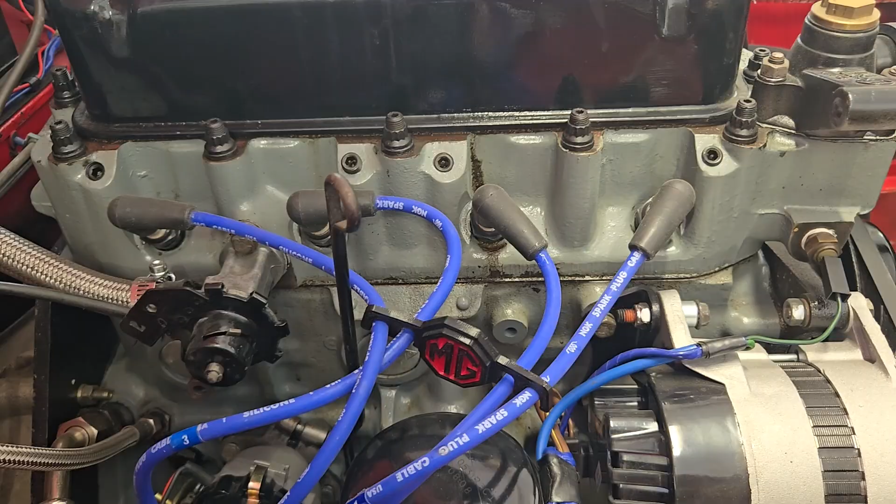All right, so this is the spark plug wire loom that I have been printing for folks. Again, emphasizing not selling, but printing and being reimbursed for shipping fees. The only other thing that I would charge anyone for is to paint it the specific color.

But this design was off of Thingiverse, and it specifically said not to make any money off of it. So there you go.

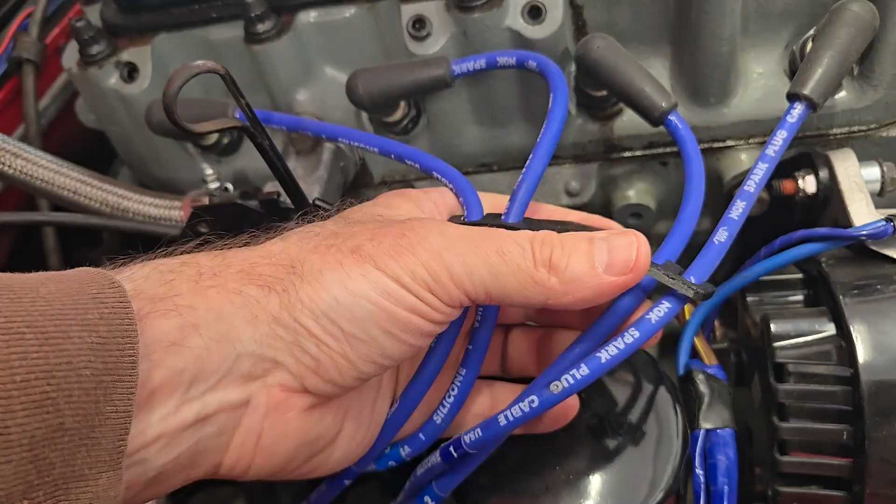There's a problem with this design though. It's two-dimensional, and it's in 3D space. Also, it is an interference fit, which means that the wires need to fit into these little slots, and there's a little nub on them that keeps them from coming out, but it doesn't really work that well. After a while, they vibrate, and you might lose the wiring loom altogether.

The biggest problem that I have with this, aside from copyright, is you can't see it. Because it's two-dimensional in 3D space, the logo should be facing up, but it's facing perpendicular to where you would view it. So I am taking it upon myself to make my own design.

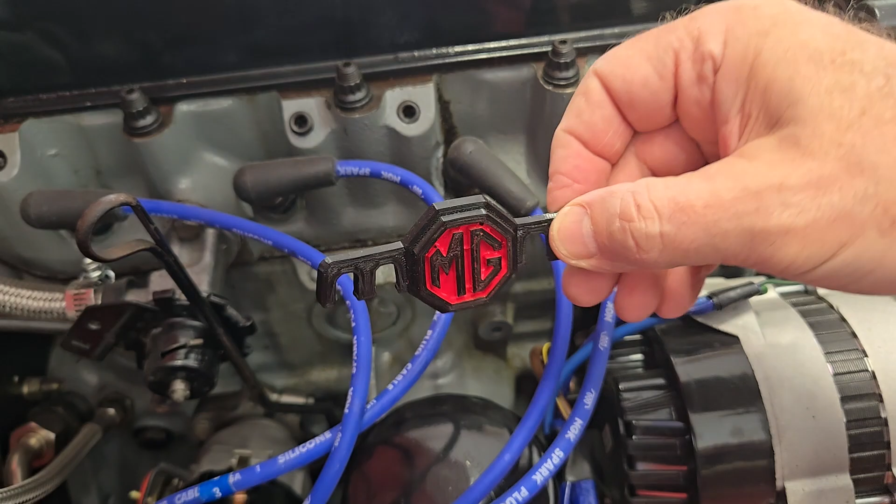Far be it for me to complain and not have a solution. So that's what I'm working on today. We're going to make a new wiring loom, and I'm going to sell it on eBay, and it will be my design, and it will be in 3D space so you can see the logo, and I'll make them available in whatever color that you want in the background here. So there you go, let's go ahead and get started.

I'll show you the design in my 3D CAD software.

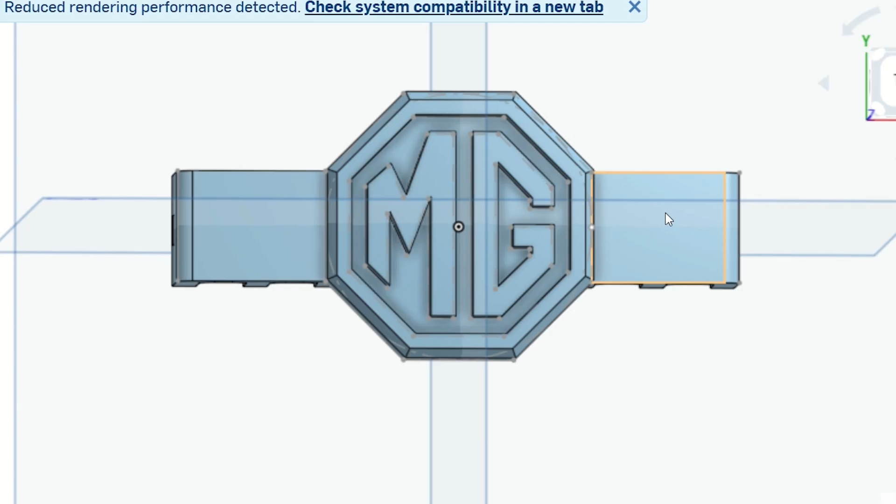All right, so this is my new design. It looks a little bit different, and that's because it has to be a little bit beefier. It's still an MG logo. It still has a three-dimensional space where you can fill in with a little bit of paint to give you a colored background. But what's different is that the wiring loom is perpendicular to the logo.

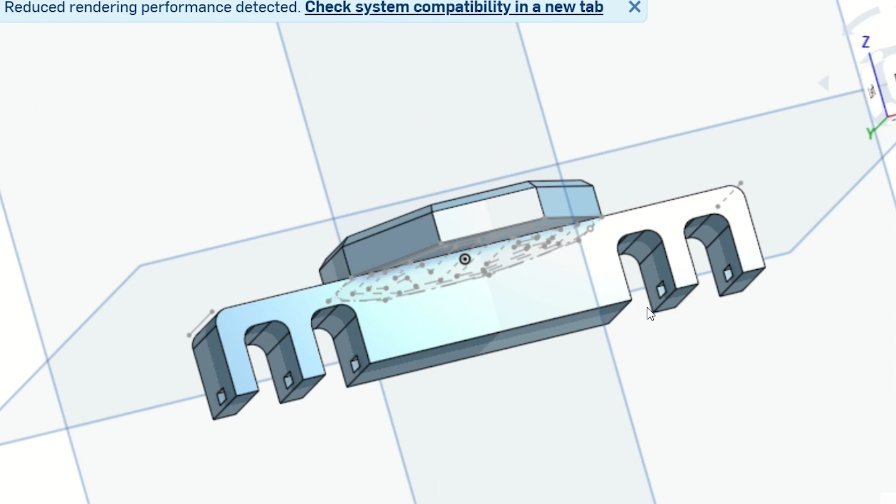So now when you have your wires on, you'll be able to see the logo. Here's the actual wiring loom where the wires go in. And one of the things that I'd mentioned previously in the video was that it was an interference fit. It had a little nub right here to catch the wires, and that was not really a positive connection.

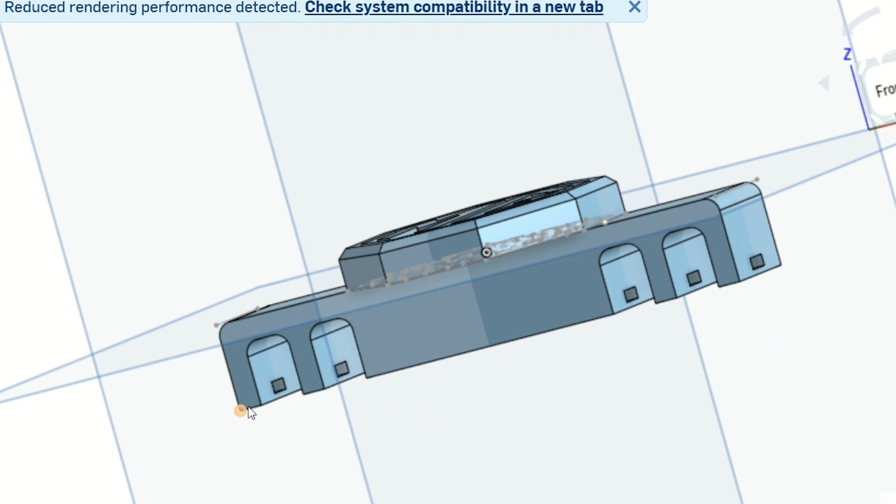So what I'm doing on this one is I put a little slot that goes all the way through that you can slide a zip tie in. And so if you take two zip ties, you put one in on one side, and then you just take the head off of the other one, and you snap it into the end of the zip tie on this end and snip off the edges. What that does is it gives you a positive connection that won't vibrate off. That's the idea anyway.

I'm currently printing the prototype, and we'll put it together and see what it looks like. I'll show you what it looks like in the print process.

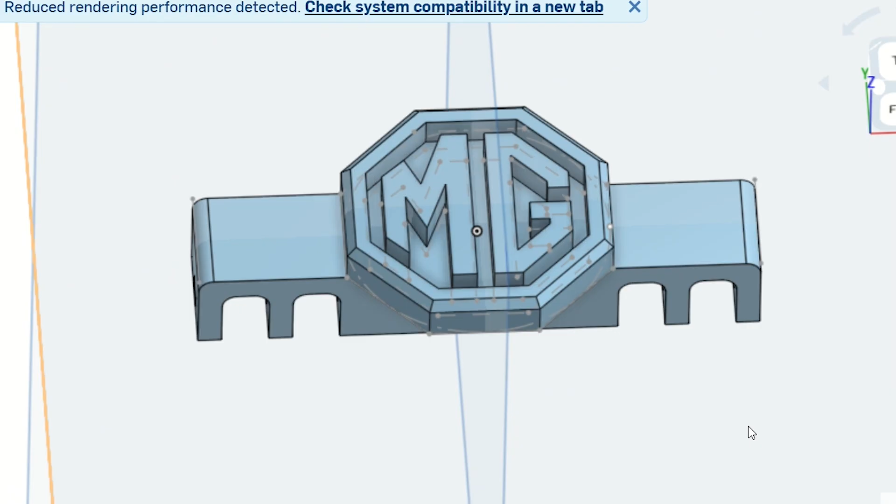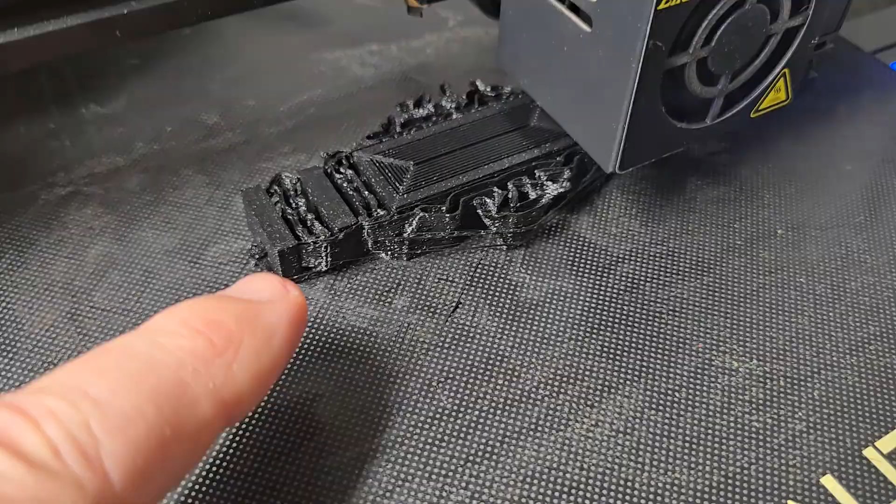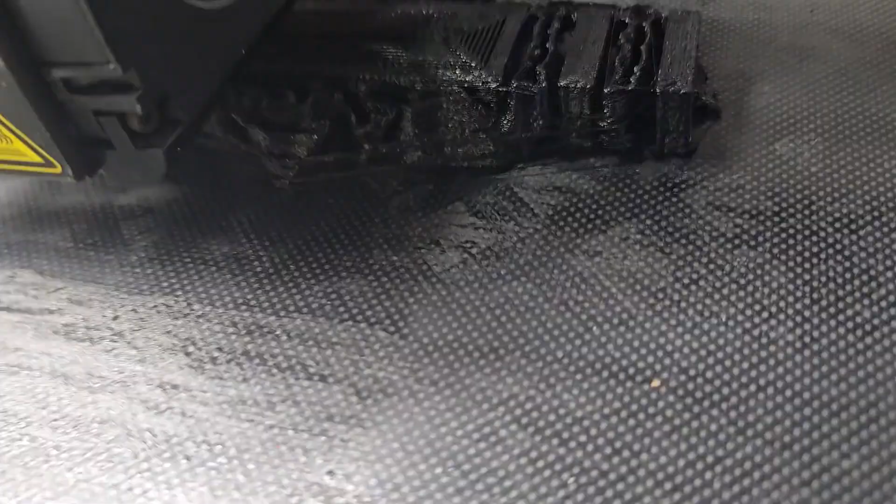All right, here you can see the printer busy doing its thing. You notice on any of the horizontal surfaces that are suspended, it does these little trees. Those are little fillers so that you can get a horizontal surface suspended in space. And that's what it's doing right here, it's growing the trees for the logo. See, that's the tree support for the logo that will be on there.

This print job takes about 4 hours, and we're about 45% done. So once we get this done, we'll put it in the car. I'll show you what it looks like.

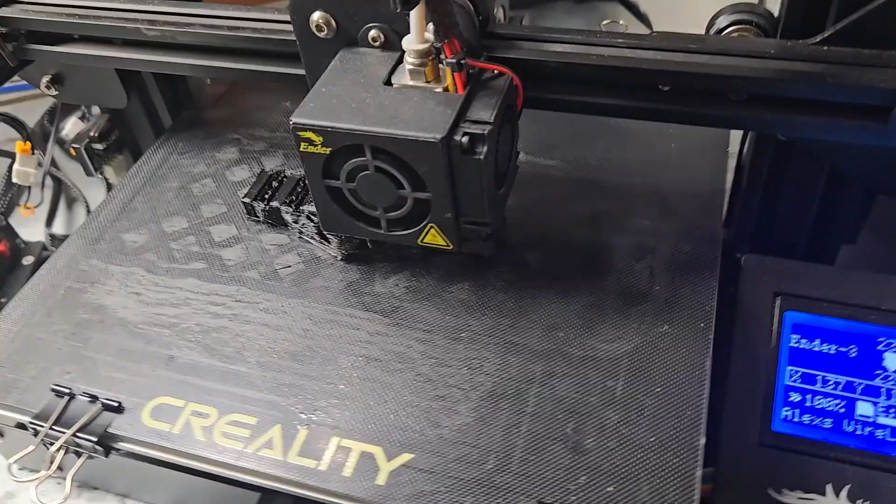There you go, prototype in place. The logo is a little bit bigger than the old version, but I don't know if I want to make it smaller. I mean, I could reduce the size, and then it would make the wires a little closer together.

But I kind of like the size of it. It really sticks out, I don't know, we'll figure that out. Also, this is done.

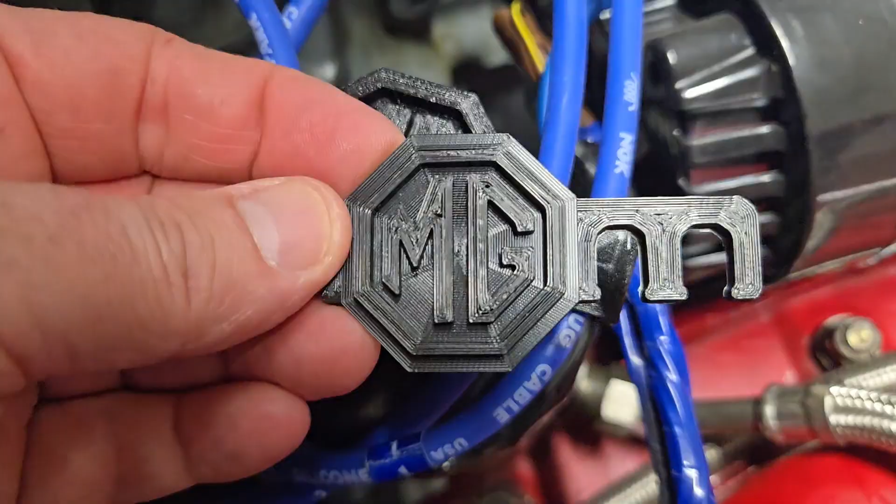It's a prototype, so it's kind of rough. The actual ones, you can see, have a little bit better sheen to them. They're printed in ABS, and they're cleaned up nice. So we'll run another one of these now that I know it fits and the wires go in fine.

You can see the wires fitting in their little slots. I haven't put a zip tie in here. That's the next thing to try, but you can see it's going to fit just fine. The spacing is just perfect.

All right, let's do a finished grade version of this, and then we'll recap the video. Great, I like this one, this is a lot better. All right, so there you go, finished grade. Got it painted and everything.

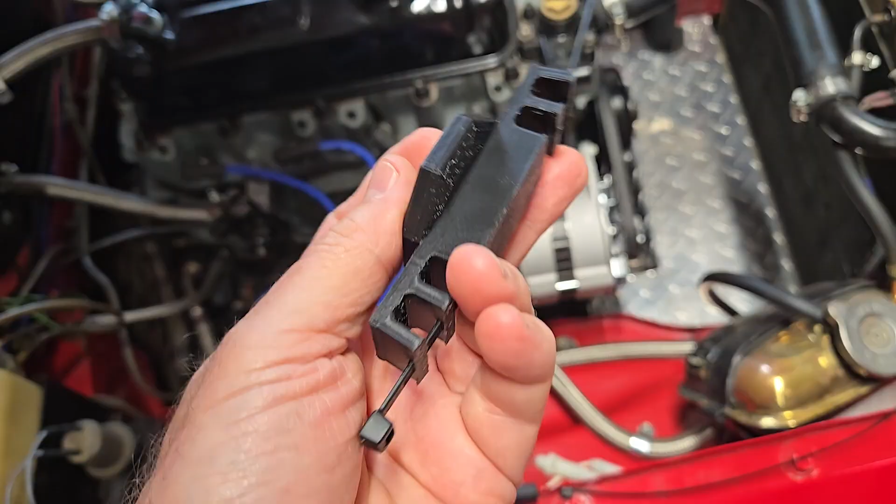Here you can see it's got a zip tie through the back. This moves nice and easy. So the concept here is that you put a zip tie through on one side, and then you take another zip tie and you just slide it on and you snip both ends off, so that the head of the second zip tie becomes the fastener that holds it in. And that will hold those wires in place, and you don't have to worry about it vibrating or anything.

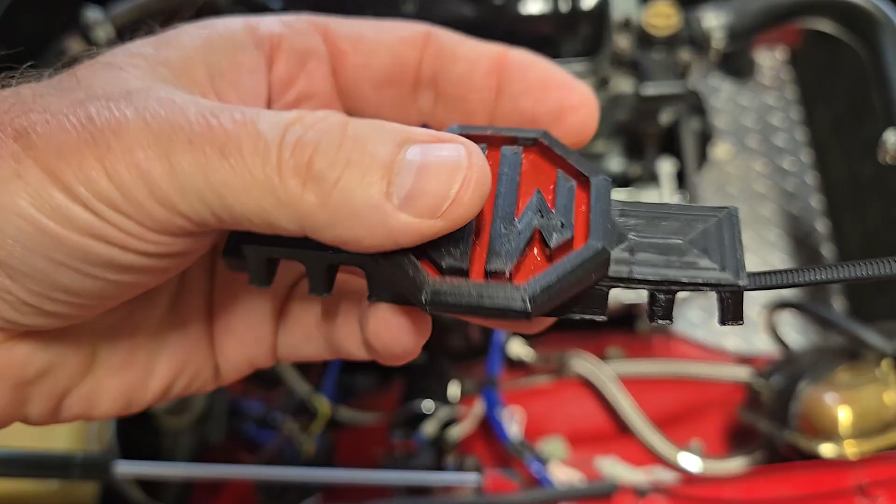So let me go ahead and get this thing installed and show you what it looks like. All right, there you go, all installed. You can see I've got the original zip tie right here, and then the second zip tie right here. I'm just going to snip those tails off.

I'll have to track that one down.

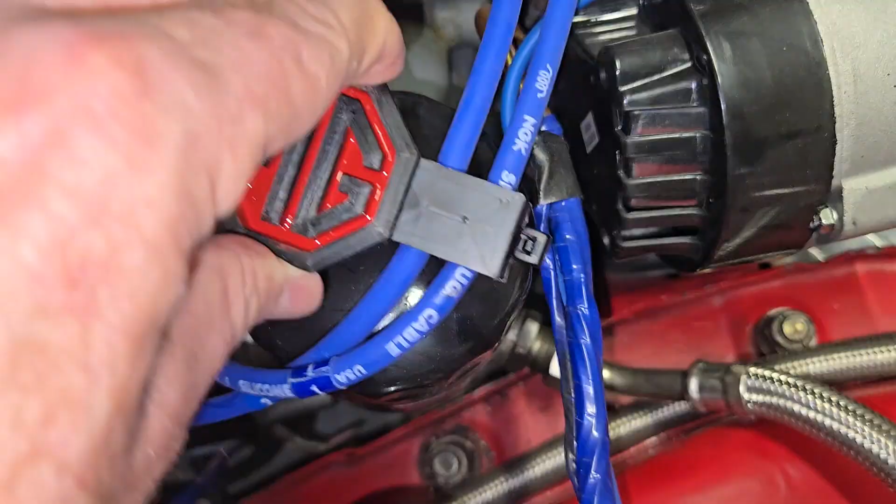I like how it kind of symmetrically lines up right on top of the oil cooler too. That wasn't by design, but it kind of works out that way. It looks like it was made for it. Well, technically it was made for it. But the other thing I like about this is it keeps the oil dipstick from rubbing on the wires, and it keeps the wires off of the heater control valve. So this is really kind of a neat little piece of kit.